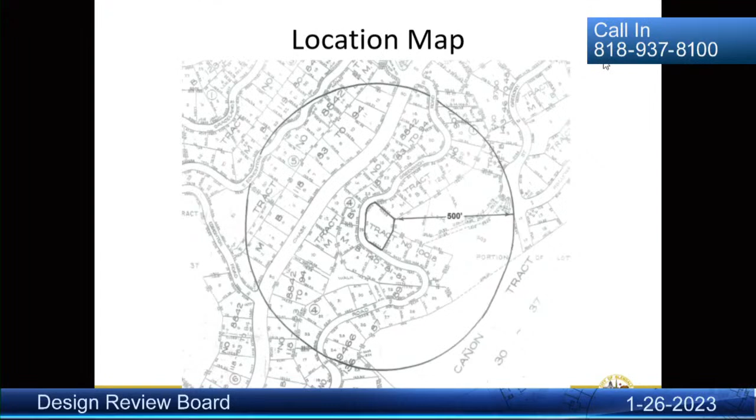On the screen here is the location map. The main street here is Chevy Chase. This outline here, my arrow, is Greenwich. The subject site is highlighted in black right here. Actually, let me just go through the PowerPoint real quick and then I'll get back to my presentation.

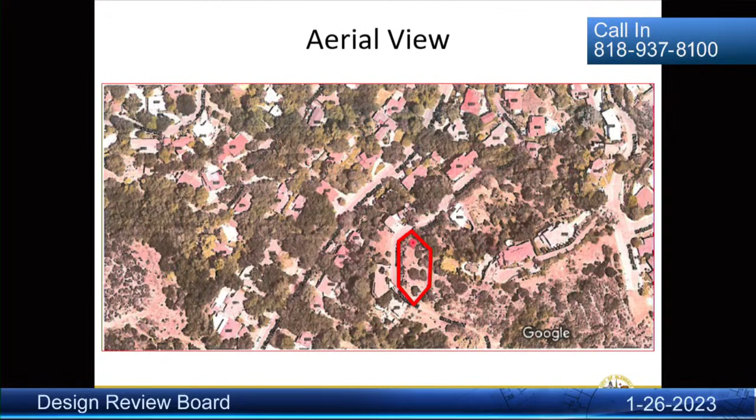This is an aerial view of the site. Again, this is Chevy Chase here where my arrow is, and then Greenwich sort of goes up this way, and the site is highlighted in red. Street view, this is the site over here. Greenwich is here.

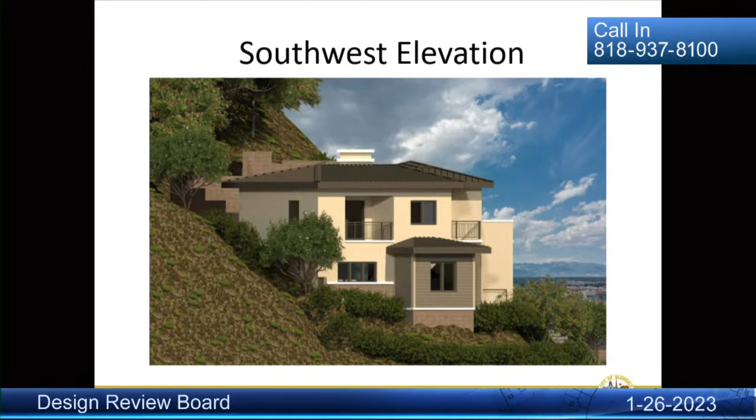Site plan, this is an outline in red of the proposed residence. The front elevation, the southeast elevation, one of the side elevations, the southwest elevation, the other side elevation - realize the house has a little angle, so things can be a little distorted. And then the rear elevation.

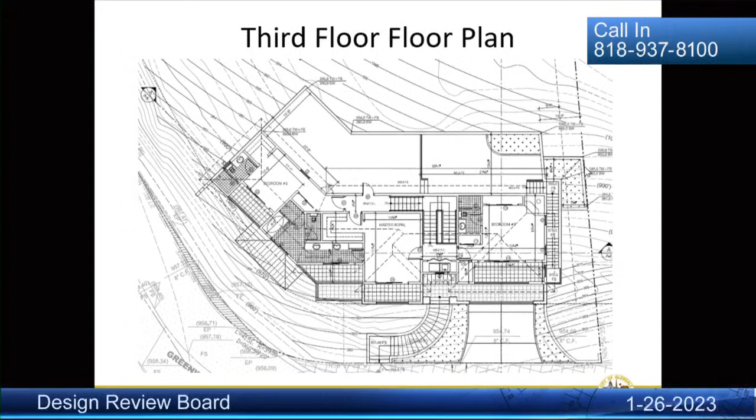This is a rendering of the front elevation. First floor plan with the garage. The second floor with the main living areas and a bedroom, and the entry's right here. Third floor. Roof plan. And then a couple section drawings.

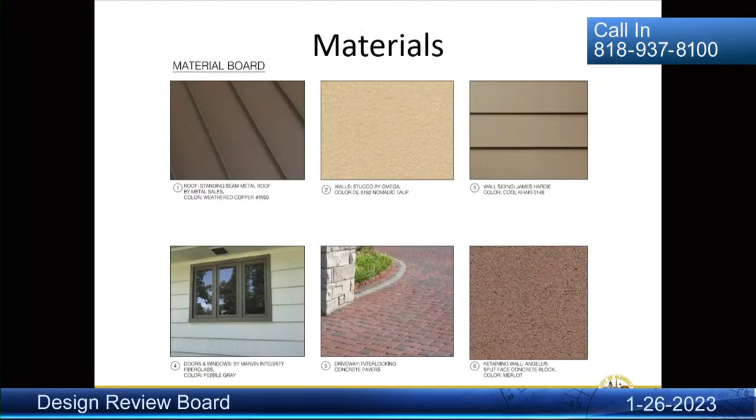Landscape plans. Material board—and I think you have a physical material board up with you. All right, so let me get back to my presentation.

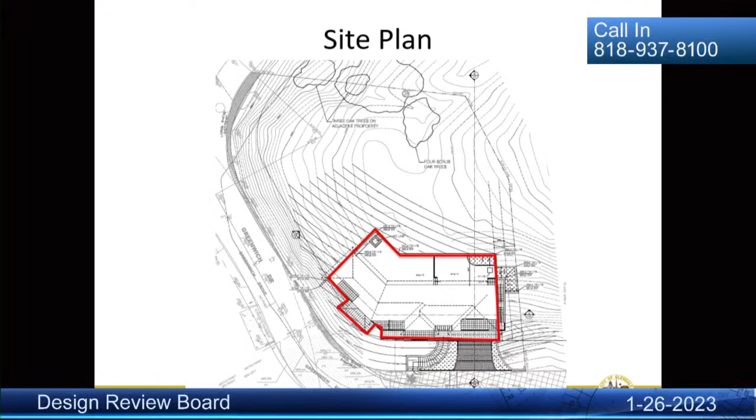Additionally, the projecting decks above the garage help mask the garage below it. What I'm referring to is this area right here. The deck extends in front of the garage and sort of masks that maybe less desirable feature.

Finally, the landscape plans are appropriate for the hillside location and include drought-tolerant plants. Staff is recommending that the landscape plans be amended to include installing trailing plants or vines or something that hangs, just to soften the appearance of the retaining walls. That is really referring to this area here, as well as in this area here.

Like site planning, mass and scale of the project is generally appropriate. The long and narrow shape of the residence, along with its angle, conforms with the topography of the site. Staff recommends restudying the balconies on the front facade and removing some from the design and/or eliminating the roofs, just to better conform with the topography of the site. But otherwise, staff is pretty satisfied with it.

That comment is really in reference to this area. There's a balcony here and there's a balcony here. Either eliminating the roof elements or eliminating the balconies altogether gives it a little more play in terms of the overall design, a little more play, so it better follows the topography. That's our suggestion there.

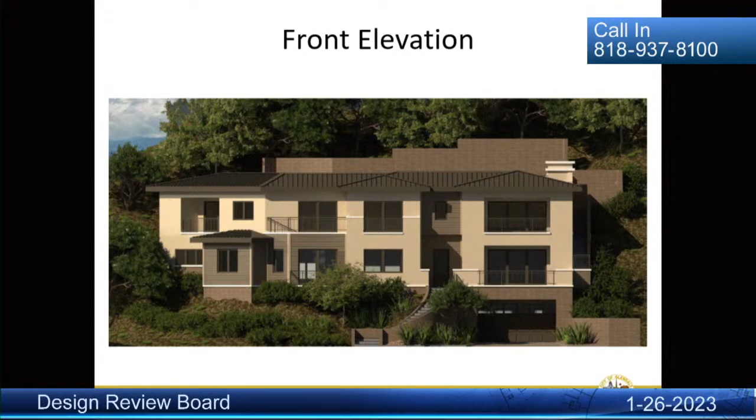And then finally, design and detailing is also appropriate in that the entry is recessed. There's high quality material used, and all of the balconies face the street, and so they won't infringe on the privacy of nearby residents. So that concludes my presentation.

Okay, do any of the board members have questions for Mr. Kiesel? Not at this time, yeah. I have a couple of questions.

So just again, for clarity purposes and perhaps a little education, up until a few years ago the city's zoning ordinance required that any kind of grading more than 1,500 cubic yards, or to build on a slope greater than, I think it was 50%, required a conditional use permit, correct? Right, but that no longer applies. That is now up to our discretion to approve, deny, or request changes. Right, but we have the ability to approve that without any conditional use permit, correct? Correct.

Okay. Was there any thinking about or any discussion with the city, Public Works, about a sidewalk right-of-way need here? Because it's very tight up against the street—there's like no sidewalk space or anything like that. Not at this point. Okay. I have put in a call to Public Works in terms of what they're maybe anticipating for improvements. Haven't heard back. I can proceed.

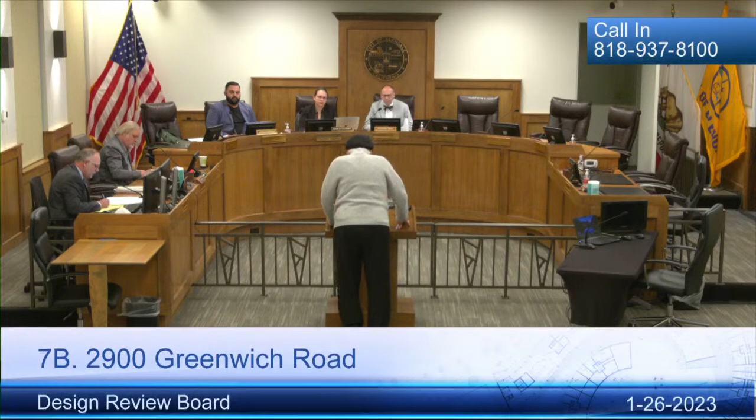Good evening, my name is Edward Hagopian. I'm the architect of this project, and I've had the privilege to design houses in Glendale, maybe more than 500 or 600, most of it hillside. We started this project just about the time COVID started.

We started about 2.5 years ago, and we had a preliminary design that was checked with the planner, and they recommended I switch it toward the right side. So after we finished everything, we redesigned the project again. The logic was that at that corner there might be some traffic issues, so to avoid accidents, we pushed the garage to the far right of the property.

Before I forget, we have a few scrub oak trees all the way to the back that we are not touching. But we are adding 9 new oak trees, which we're showing in our landscape plans.

This property was purchased by the owner like 15 years ago, and it was kind of a dream house for the owners. I'm surprised he was not able to make it—maybe any minute he will come. And he is actually here, Ed. Yeah, okay.

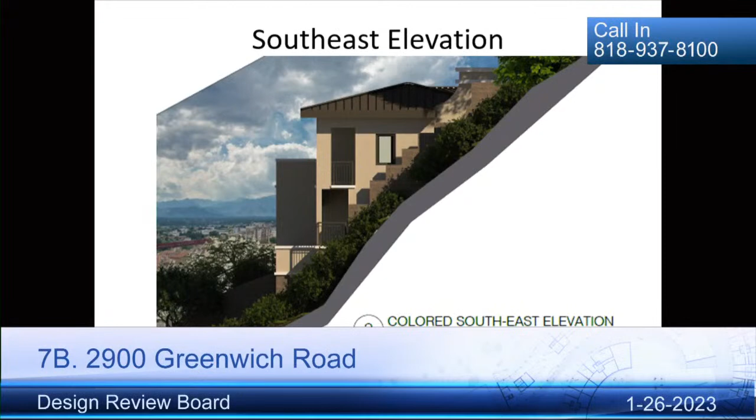The only roof that we have on the first floor, if you can show that. Sure, this is the area I was talking about, it's pretty flat here. If you eliminate the balcony or eliminate the roof and just have a railing, it does step back a little more, so that one we can accomplish. What did you want me to show? I thought you were talking about that first story roof that we have. Right here? Yeah, sure.

I think eliminating the balcony isn't so much the issue as eliminating the roof and lightening up that area. Correct, most of the balconies have a room underneath. So you would be open to reducing the roof that he just mentioned? That roof, I hope we can, yes.

Another thing - I love that you provided the material board, thank you - is regarding the stucco. What is the texture? Is it 2030 sand or smooth stucco? It's smooth stucco. Smooth, okay, thank you.

I had a question about the retaining wall, particularly the one at the northeast corner. It appears on the plans that the top of the wall there is listed at 1,000 feet elevation, right in line with or very close to the 1,000-point natural grade. So I'm wondering, is there going to be freeboard behind that wall, or is it going to be butting right up against the slope? The freeboards are not included in the 15-foot retaining portion of the walls. Okay, maybe we'll have a foot or so just for the drainage.

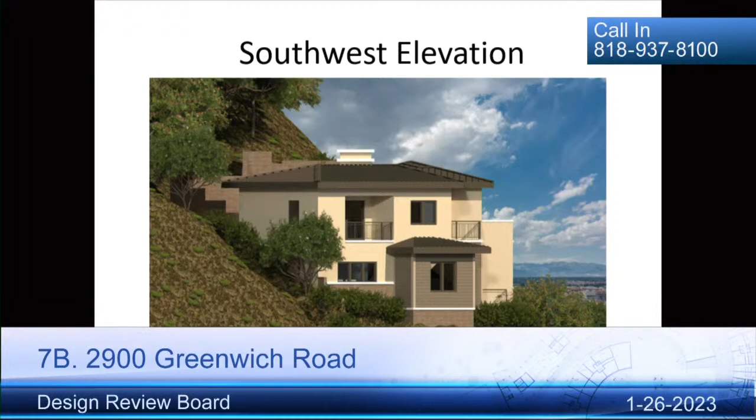How about the balcony that's furthest on the west side there, on the left of this elevation? That inset one right here - this one doesn't affect me as much. I think it's because that lower roof and siding of the second floor volume helps to offset that. That one in particular, I'm not as concerned about. It's really the right side of that elevation, but both bays on either side of the front door, I think, could be more cohesive with each other.

Just as food for thought, we've worked with Mr. Hagopian a lot over the years, and there's certain signature aspects of his style. One concern I would have if we eliminated completely the stucco rising up to the railing would be that the balconies would feel kind of flimsy and ephemeral. I'm wondering if we narrowed those piers, had narrower piers that would just rise up at the corners with the metal work between them, if that could be a solution the board might think is appropriate.

Would that also mean widening the windows? Because there seems to be an alignment that would be lost, and below as well.

I would just be concerned because we have a lot of hillside, on the downslope hillside houses we often have just railings that stretch for the whole width of the house and often have that cruise liner kind of look. On a downslope, it's a different animal than this. The house just around the corner, 2920, is very similar - it doesn't have that, it has much more just railings, open railings. Just for discussion. But I do think that's a great example, actually. I don't know if you have that to pull up.

2920 Greenwich. Slide that over, I guess. Maybe slide the presentation back to the right side, and then I think you might be able to make that not full screen.